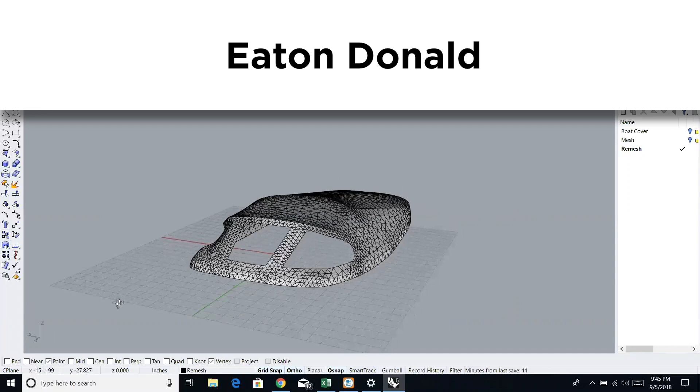I am joined today by Mark Jewell, company founder, and today we're going to be showing an example of custom canvas for marine custom canvas fabricators. Here we are showing a cockpit cover, or an example of a cockpit cover. This may be different depending on the type of boat that you're working on.

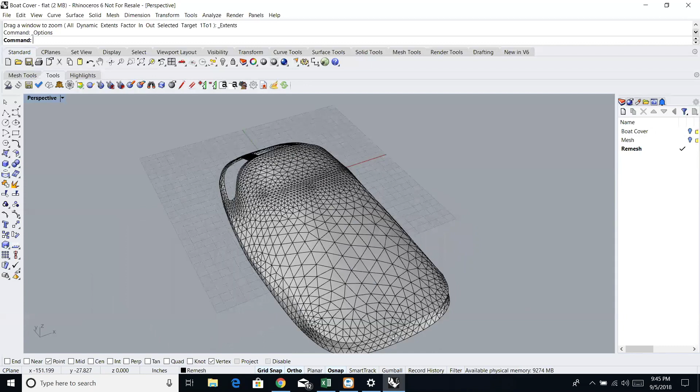And what we're going to be doing today is processing the patterns associated with this cockpit cover and showing you the workflow in ExactFlat using what we call 3D to 2D digital patterning. We're trying to create these patterns in an efficient manner that's going to be much more efficient than doing this manually.

Mark, hello. Hey, Eaton, how are you doing?

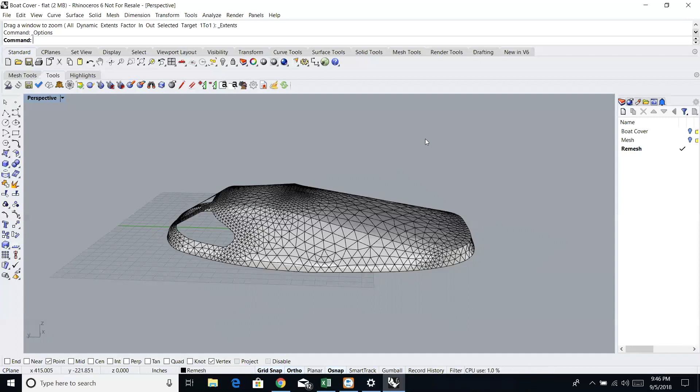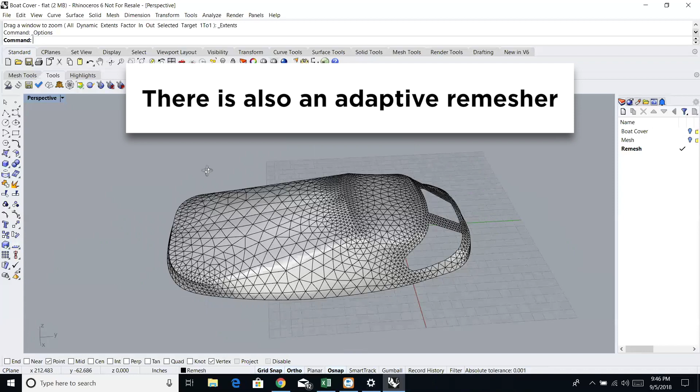I'm well, thank you. So Mark, what I'd like you to do is show everybody what's involved in creating the patterns for this boat cover here, please. Sure. So, Eaton, we have a good mesh, but one of the tools I'd like to show everyone is our uniform remesher. We have a couple of different meshing techniques. One of them is called a uniform remesher, and I'll remesh this cover or top so we can take a look at what a remeshed surface would look like.

And so the mesh is important because it represents the fabric pieces itself. Is that correct? Exactly. So basically, the better mesh, you have a good representation of the parts that you're going to manufacture. Exactly. You want to start off with a good mesh because, as they say, garbage in, garbage out. So a good mesh is going to give us a really good pattern.

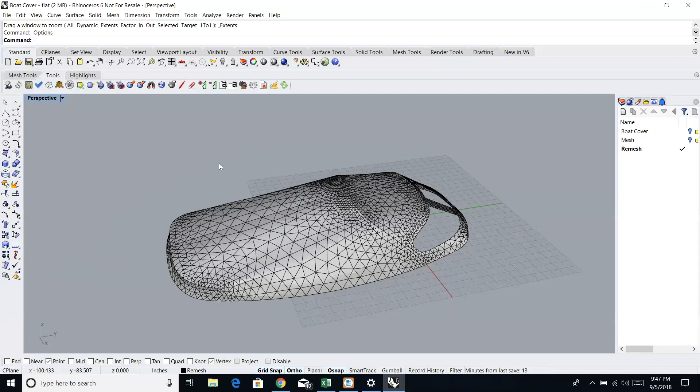And so I'll just point out that we are showing ExactFlat for Rhinoceros 3D. This is a model that was captured through a digitizer and then brought into Rhinoceros 3D. Mark, why don't you show the remeshing process and then talk a little bit about what we do to get to flat patterns?

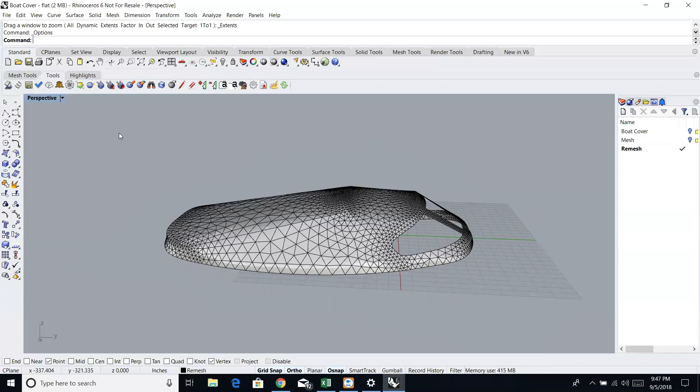Sure. So the first thing I'm going to do, Eaton, is use a command in Rhino called weld vertices. This is going to take out any of the wrinkles or bad triangles in the surface. So I'll just highlight the part. As you can see, all these points light up, and I'm just going to hit enter on the keyboard, and then I'm going to go into our first set of tools, our first tab. These are the ExactFlat tools, the mesh tools.

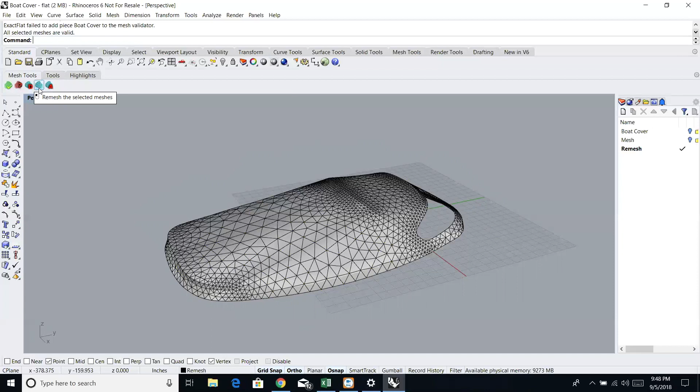I'll click this, and I have a mesh validation tool, so I can select the surface again and hit enter, and up here it says all the meshes are valid, so we have a good valid surface to work with. Then I'm going to go to our next tool over here, which is our uniform remesher. Again, I'll highlight the piece and hit enter on the keyboard. This is going to bring up our remeshing dialog box.

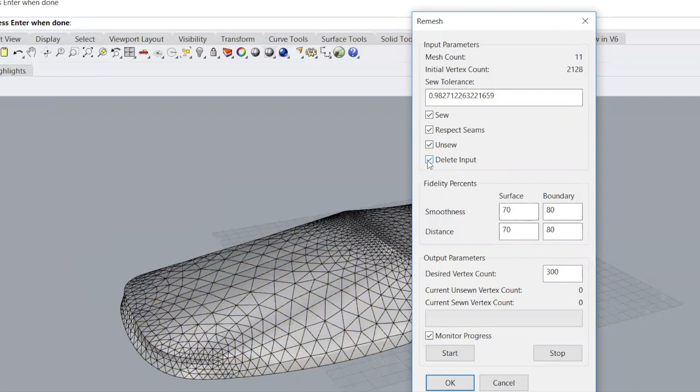So I'm going to hit sew and respect our seams. Then I'm going to have it unsew and delete the input. Deleting input means that once it's created our new mesh, it's going to get rid of this old mesh. If I don't click that on, I'm going to end up with two meshes, a good one and a bad one. The next thing I want to do is go into our smoothness.

So the boundary, which is the boundary perimeter out here and around here, I'm going to set at 90. And I'm also going to set this one here at 90 for smoothness. The vertex count is set at 300, so that would mean 300 faces or triangles. I'm going to bump this up to about 1800. So that increased vertex density should lead to a higher accuracy mesh around curves.

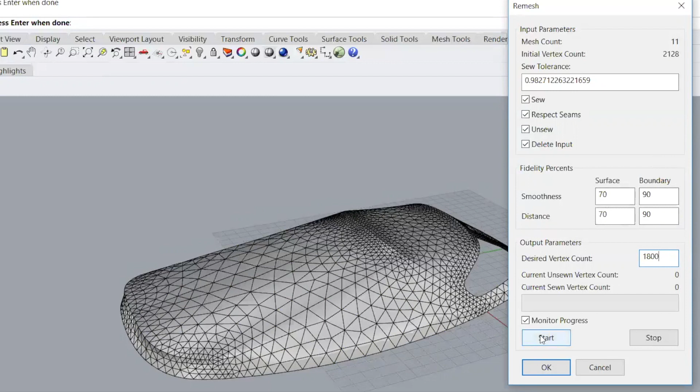Is that correct? Exactly. All right. And the smoothness actually adds a little bit of smoothness around these curves. So I'll just start this off, and we'll see how the mesh is changing.

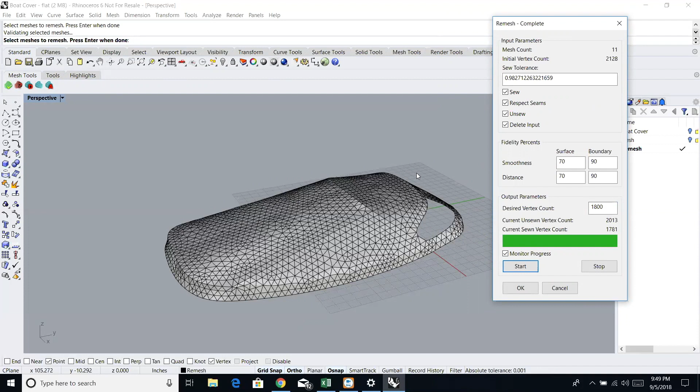So right now we're adding more vertices, and you can see visually how it's changing the mesh. So it's reorienting the vertices, and it's adding more triangles to create a denser mesh. Let's talk a little bit, before we go on, about the reorienting of the vertices, because that's essentially one of the techniques that we use for flattening to get rid of strain and sag. Is that correct? That's exactly it, yes.

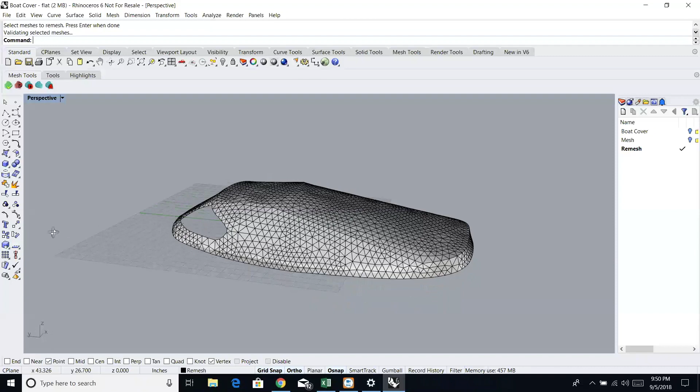Okay, so by changing the vertices, we are smoothing the material or relaxing the material, and we're also finding areas of sag where we want to put more tension in the material. Is that... That's exactly correct. Okay. So it's like fabric simulation. Okay. So now that we've created a good mesh, which is the start of our process of creating digital fabric, where do we go from here?

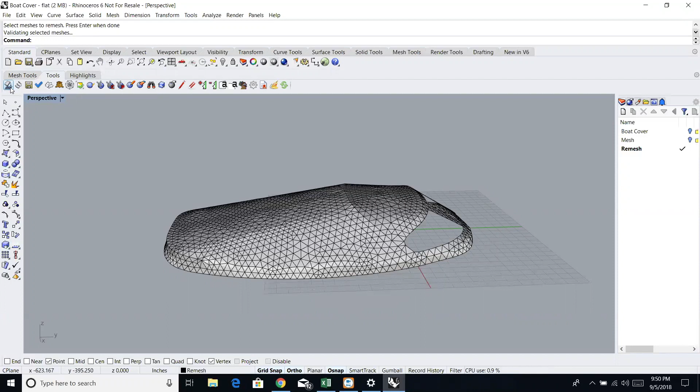So once we've created this nice mesh, the next thing we'll do is go into our tool set. And our first icon here is basically the select pieces for flattening. So as you can see here, these pieces have already been assigned by the designer. So these are basically how the pieces are going to flatten. So this is a 3D model with the split lines already in place. The split lines represent pattern edge boundaries.

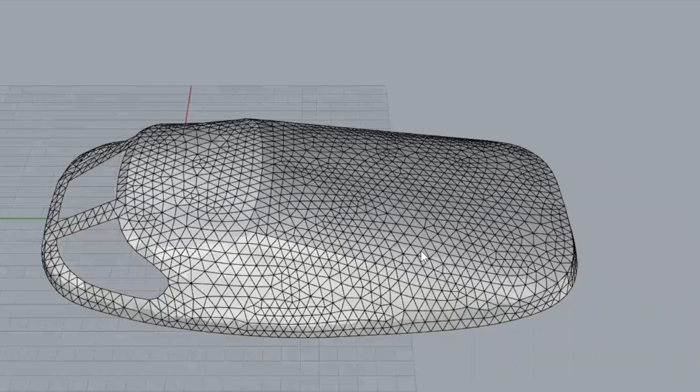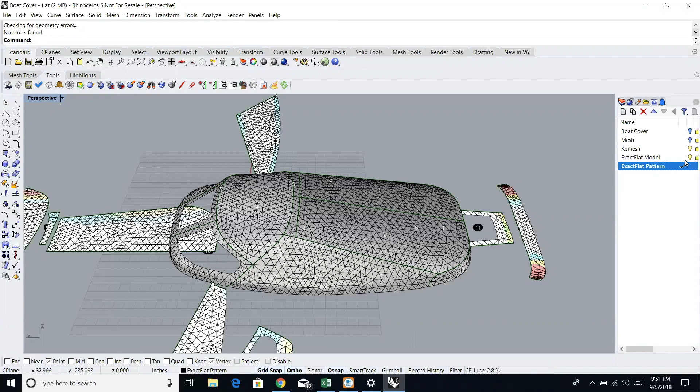Correct. So what we'll do here is we'll go in, we'll select our flattening tool, and again, rectangle, select the part, hit enter on our keyboard. And now you can see we have our 3D model here, and we also have our 2D pieces laying in the background. So what I'm going to do is just highlight or make this ExactFlat pattern active, and I'll turn off these other layers, and we'll go into our top view, and I'm going to zoom to extents.

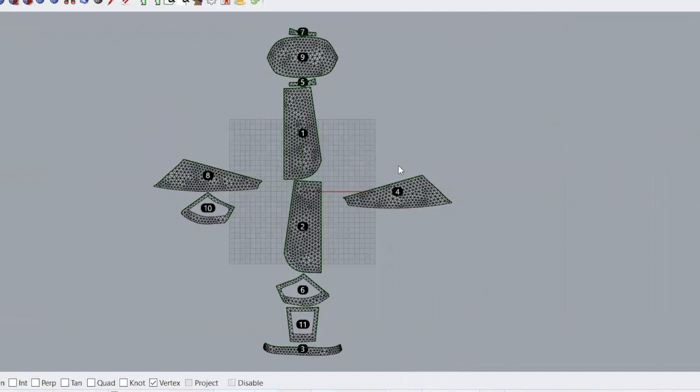So we have all these pieces in, and I'll just turn this into wireframe so you can see when the flattener flattens the pieces, it actually assigns numbers. So it's like a paint by number, or you can line up the pieces. Now you actually have identification on each one of these pieces. So this is just useful for keeping track of which piece is assigned to which piece, neighboring pieces, and if you have larger, more complex projects, then the numbering of the pattern pieces is helpful for downstream processes.

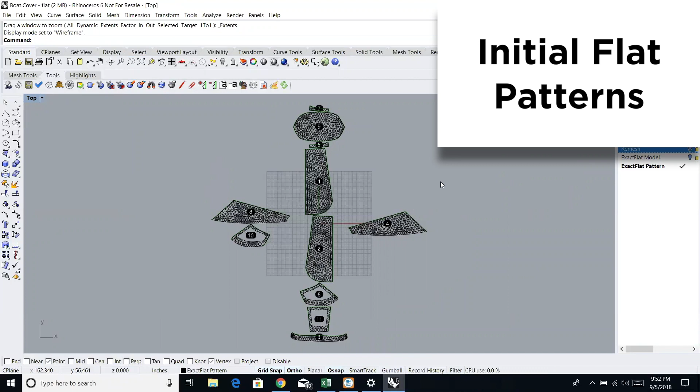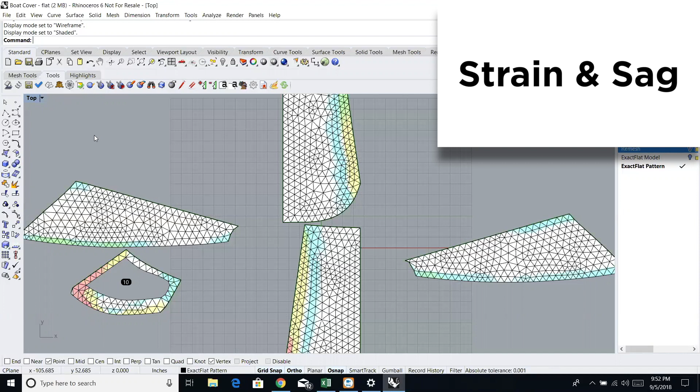Exactly. So I'm just going to go back into here, and we're going to turn on our finite element analysis, which actually shows the strain on the part. So I'll go into the shaded view here, and there isn't a lot of strain, but you can see here there's a crimson color. This would be maybe 11% strain on the part, but we haven't optimized it yet. So this just gives us a visual cue of where the stress and strain would be.

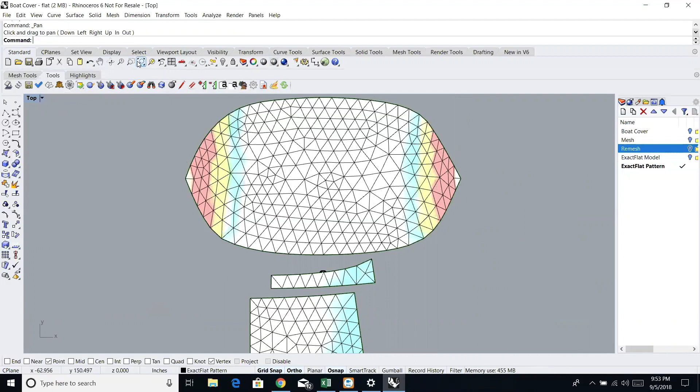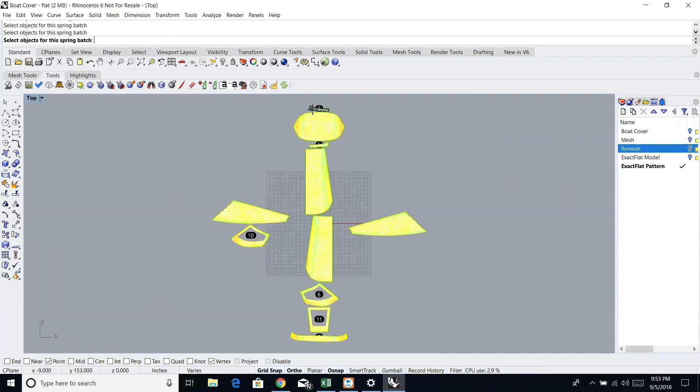Here's another good example of a part that has a little bit of strain in it, but as I said, we haven't gone in to flatten it or optimize it yet. I'll just go back out here, and now what we're going to do is go to our next tool, which is our optimize tool, or some people call it the spring tool, and we'll go in and we'll select the pieces that we want flattened. And I'll just hit enter again on the keyboard, and we'll watch what happens.

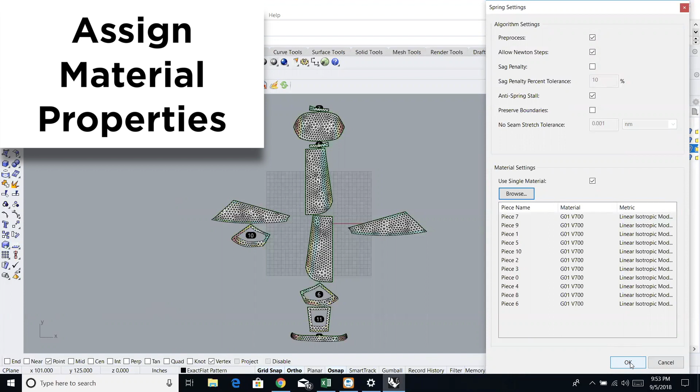So right here, we have our material settings. We can browse different materials that we may have. So I'm going to use a Sunbrella type material, and I'll just hit OK here. And I'll hit OK on our material settings, and we'll see how this tool works. So it's going to go through each piece, and it's going to try to obtain zero strain on each piece, or zero energy on each piece.

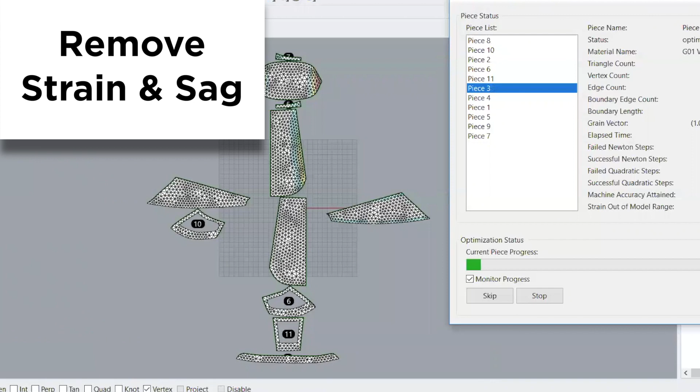So if it's zero energy on each piece, that means it's eliminating both the strain and the sag. Is that correct? Exactly. And that's how we get a very accurate pattern. So from a geometric perspective, you are trying to maintain the seam edges adjacent to pattern pieces, while at the same time reorienting the surface area. And I can see the surface area is changing on some of these pieces in such a way that the strain and sag is eliminated. Correct. Okay. So if I go over here, it's finished. So that took about 56 seconds.

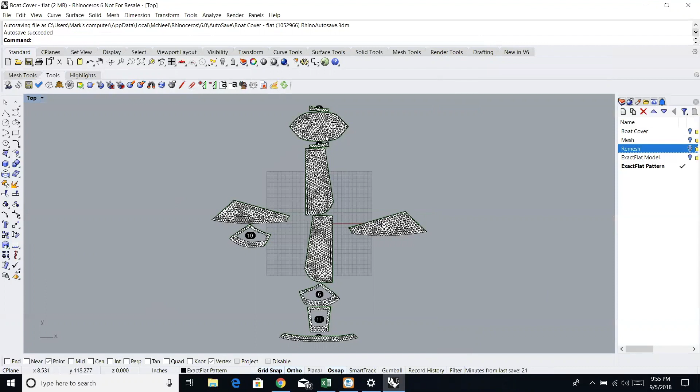Again, that has a lot to do with how we redid the mesh. We made a really nice mesh, and next thing we... Okay, so could you just arrange these pieces in a way which is visually similar to the way they're going to be sewn together? Sure.

Sure. So one of the unique features that we have in this tool is what we call our find feature, which is in our tools. And if you look here, the binoculars represent our find tool. And I'm going to set our offset at about 10 inches. So we're working in imperial units. So I'm going to set this at 10 inches. And I'll just go around.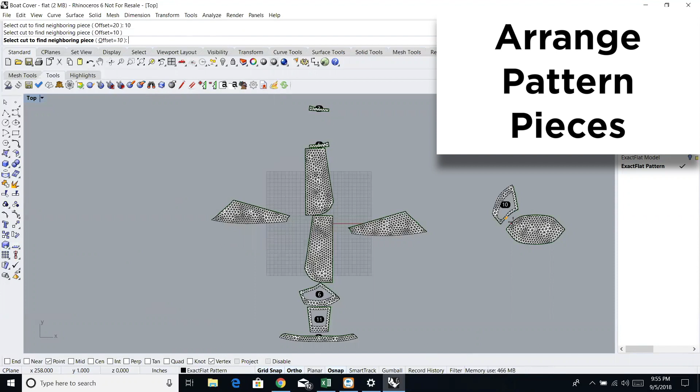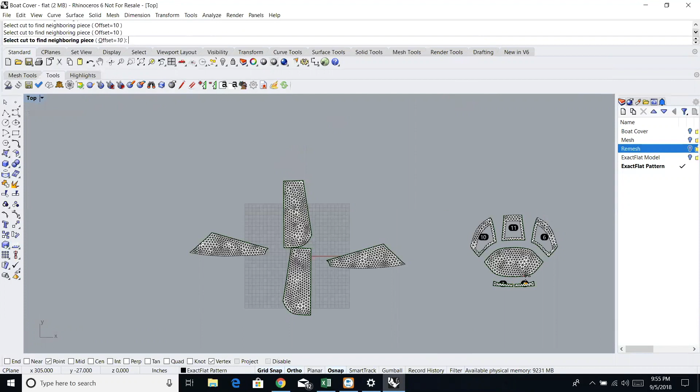And as I select an edge here, you can see it'll actually pick the piece and highlight the piece that it gets matched to or mated to. And so is this because the individual vertices in 3D are associated, and then you maintain those associations in 2D? Correct. So that's a very valuable feature.

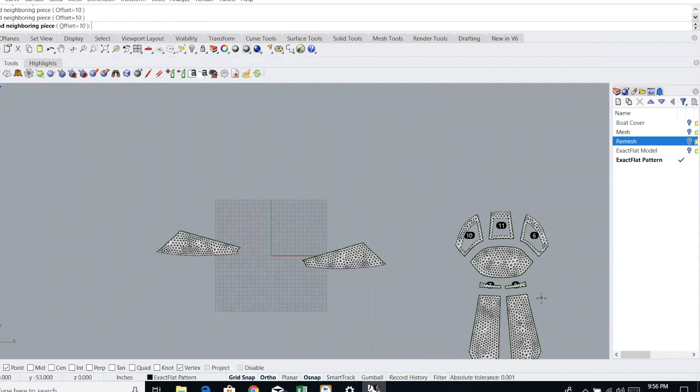You know, in other 2D tools that are used for patterning, you would have to eyeball all these pieces because it's coming as a 2D piece. In our software, we start off in 3D, as you said, and we transfer the vertex information from the 3D model to the 2D piece. So we know exactly where everything fits.

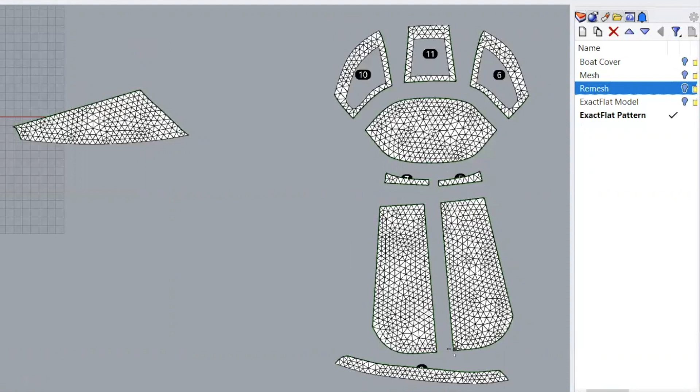So eventually these pieces are going to be sewn together. So this is not just a time saver in laying this pattern piece out visually. It's also a way to ensure that your pieces will fit together perfectly. Correct. Okay. People want to know about the accuracy because so many different programs out there are claiming to flatten from 3D to 2D, but they have problems with production level accuracy.

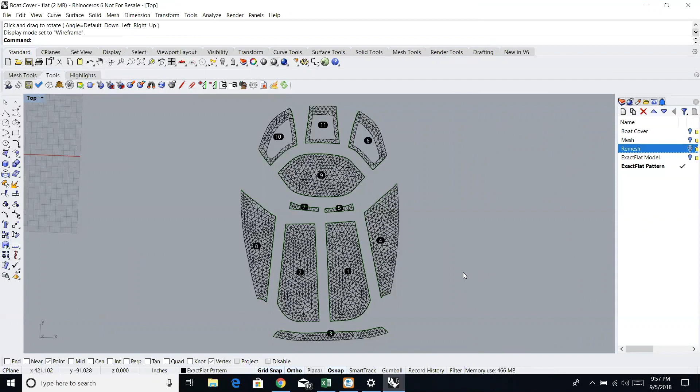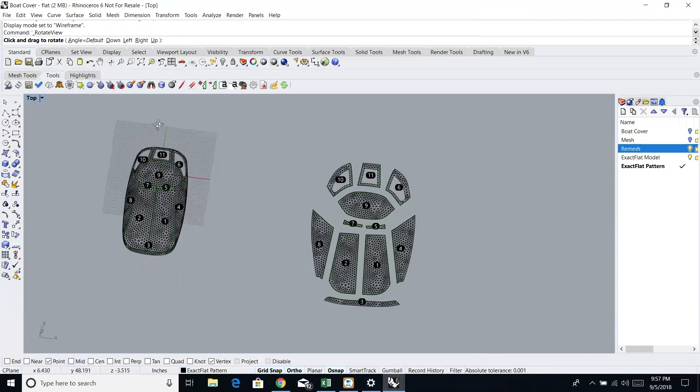So what I'd like you to do is go through a process of measuring pattern pieces in 3D, and we're going to compare them to the measurements in 2D. Okay, so what I'll do here is I'll just go back into our layer and I'll turn on our mesh. So we have over here our 3D piece, and over here we have our 2D piece. You can see that this is in 3D. And I guess we'll just start measuring.

We'll start from the bottom, Eaton. Okay, sure. Why don't we start from the bottom? So piece number 3, what is the 2D measurement and what is the 3D, or whichever you want to do first? Okay, I'll start over here with the 2D. So I'll go to piece 3. I'll highlight that, and we have an area of 704.866. And if I go to my 3D piece here and hit enter, we have an area of 704.065.

Okay. So we are off by about 3/4 of a square inch. Right. On 700. So that is, for production purposes, perfect. Exactly. Okay, let's go measure some of the other pieces, please. Okay, so we'll do number 2 here. 2D, so we have 2,821.97.

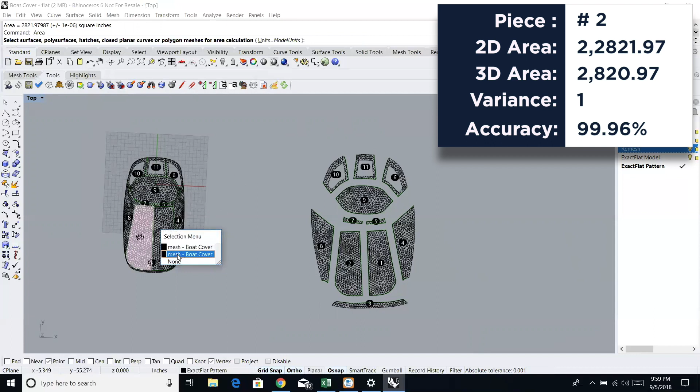And if I select piece number 2 in the 3D, we have 2,820.97. Okay, so we're off by about 1 square inch on 2,800 square inches. Again, from a production standpoint, that's essentially perfect. Right. So number 8 is 1918.39.

And if we go into number 8 here, we're at 1917.51. Okay, more or less 1 square inch on almost 2,000 square inches. Number 7, the small piece here, is 100.86. And if I go to number 7 here, whoops. And we're at 100.80.

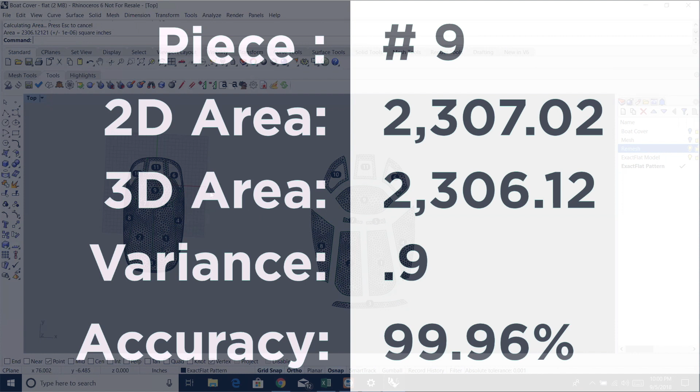Okay, and then let's get to number 9, because that was one of the pieces that had some strain in it and some sag points as well, if I remember correctly. If you can do both 2D and 3D, please. Okay, we're at 2307.02 in the 2D. And 2306.12. Okay, that's off by about 1 square inch on 2,307 square inches. So from a production standpoint, that too would be perfect.

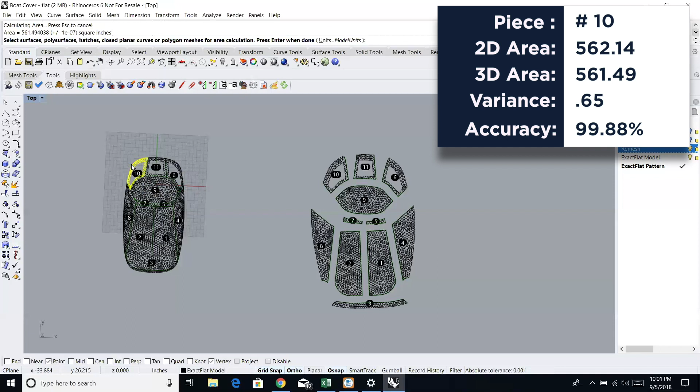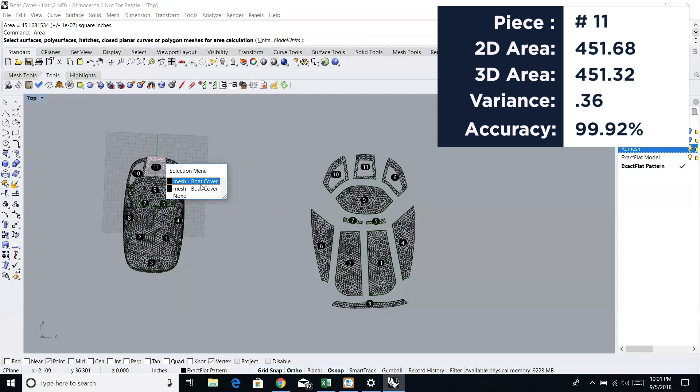Right. And if we look at number 10, 562.14. And number 10 here in the 3D, we're at 561.49. Okay, a little bit more than half a square inch there. Again, perfect. Okay, and this selection here, number 11, 451.68. And in the 3D, we have 451.32.

So if we look at all of the 7 pieces that we've measured combined, the area of the 2D parts are 8,866.92, the 3D 8,862.27, for a variance of 4.65 and a total accuracy of 99.94%. I think everybody would agree that this is well within the tolerances that would be considered acceptable for manufacturing. And the key point we're trying to make here is, in about 5 minutes, you get what are essentially perfect patterns.

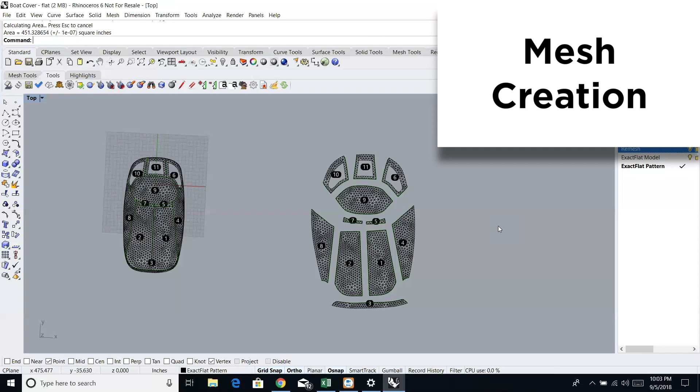Okay, so it's in part because of the way that we construct the mesh pieces in the beginning. It's in part because of the way that we assign the engineering characteristics of the material. Yes. And then it's in part in the way that we have the mathematical algorithms simulate the strain and the sag. Correct. Okay, let's talk about the things that you need to manufacture these things and put these pieces together so that they do fit.

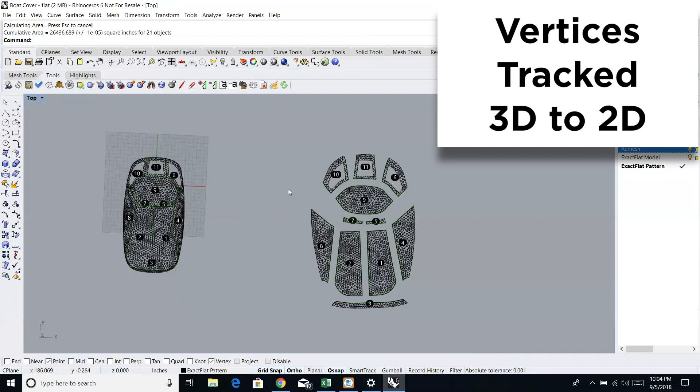Show me how you put alignment notches in here, and let's have a discussion about why those are so accurate. Since, as we mentioned, we're going from a 3D to 2D, then we track the vertices from the 3D and onto the 2D. When we add our notches, and I'll just add an eye notch, or some people call it a slit notch here. I'll hit my add button, and as I go around, you can see when I select one edge here, it knows exactly where this goes into all 3 pieces. So this notch gets sewn to this piece, and it also gets sewn to this piece.

So this gives you a very accurate way of, as I said, we used to call it walking the pattern, where you have to eyeball. In this case, the software knows exactly where the notches go. So how does it know that? Let's just talk a little bit about that. Help people understand how it knows precisely where to put. If you select a location you'd like to have a notch, it finds the location on every adjacent or related pattern edge. How does it know that?

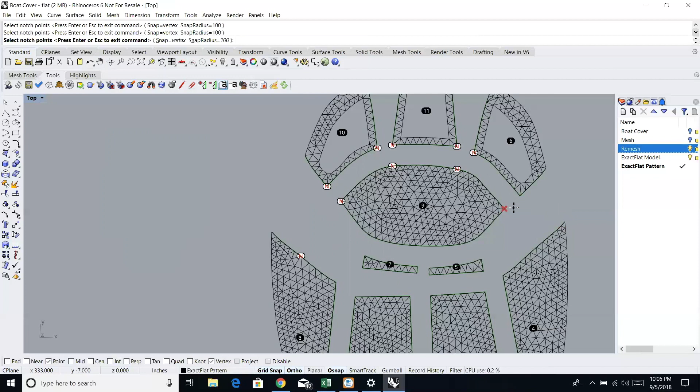Well, here, I'll just throw this one more piece. Actually, maybe what I'll do is I'll zoom to extents so we can see the model. And as you can see, the notches on the model are on the 3D model. So because we know where the vertices are on the 3D model, when we go to the 2D model, it basically knows exactly where to place these notches.

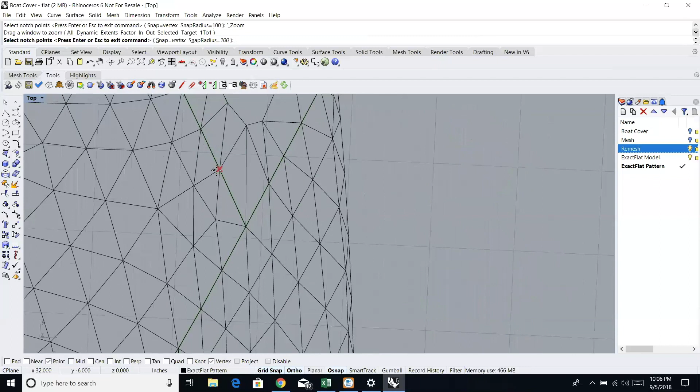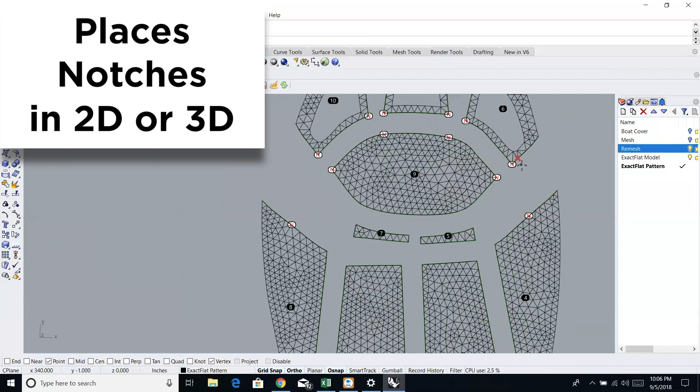So for instance, if I go into this area here, there's a notch that would go right here. I'll place it right here. Now if we go on to our 2D pattern piece, you can see it's exactly notched where it had to be. So we can notch the 3D shape or the 2D shape. Whatever we do to the 3D happens to the 2D and vice versa. Okay, so the accuracy is based on the vertex locations.

Mm-hmm. Yes. And because the pattern pieces are associated to one another in 3D, and the pattern edges or the seams are associated to one another in 3D, during the flattening process, those precise locations are maintained. And therefore, when you place a notch on one edge, you do not have to guess where it goes on the other edge. Correct. Exactly. So it knows exactly where the notches have to go.

Okay, so we were talking about accuracy before. So accuracy really means, can I put together a sewn, fabricated piece of custom canvas for an individual boat and have it fit perfectly? Because that's what people care about. They just care that it fits perfectly and it's correct. Right. So there is the meshing process at the beginning, which is the start of the creation of what we call digital fabric. Then there is the highly advanced mathematical algorithms, material assignments, and so on.

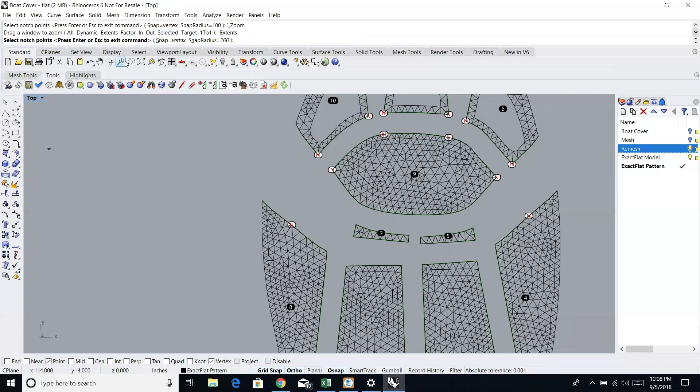That is part of the flattening process. Right. And then we have here the notch locations for the sewers so that this can be put together in an accurate way that leads to great fit. Correct. Okay. Why don't we put a few more notches on? Just zoom out if you wouldn't mind. Just show people how quick and easy it is to do this.

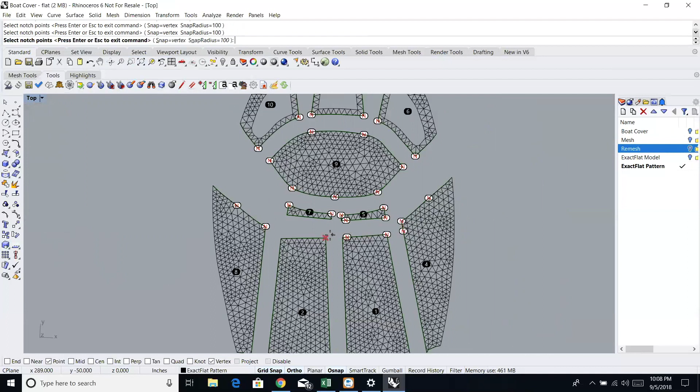And then what's the next step after that? So just go ahead and put some notches on if you can walk us through the final steps of the process. Yeah, so basically I'll just add some notches here and here. I'll put a notch here and we'll just quickly go through and you can see how quick this works. You can imagine what it would be like if you had to use your eyeballs to eyeball exactly where all these notches went. It would drive you crazy.

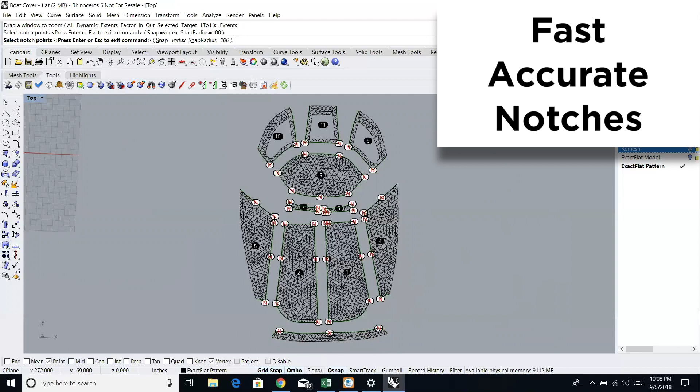So I'll just go through here. And let me just zoom out here a bit and I'll put one here. So you can see we've got basically all the notches added onto the piece or ready to go. I'll just get out of my notching tool, close that. Next thing we'd want to do is export the DXF.

So we don't use the Rhino export DXF, we use our own export DXF, and the reason being is all these notches and all that information, if I just saved it out as a Rhino DXF, all that information would be lost. When I save it out as an ExactFlat DXF, notches, seams, all that information is going to go out to the DXF for our cutter or our plotter.

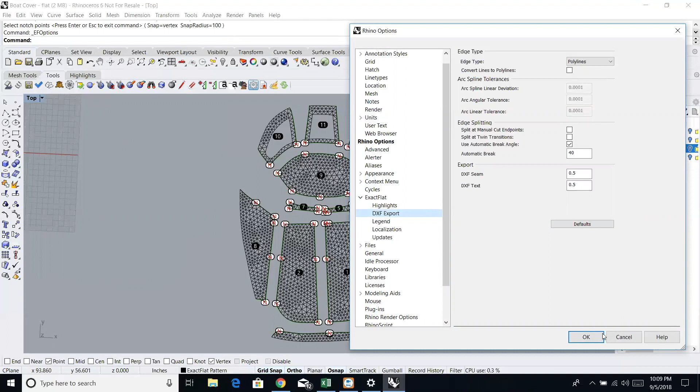Another thing I'll just show real quick, Eden, is if I go into our tools, and we're in our ExactFlat tools, and I go to my DXF export, you can see that the seam line is set at 1/2 inch, and my notches were 1/2 inch as well. So this is a very large canopy or cockpit cover. So when we go in, we can take a look at how that's going to look in our DXF. I'll just export out the DXF now, and we'll just call this cover.

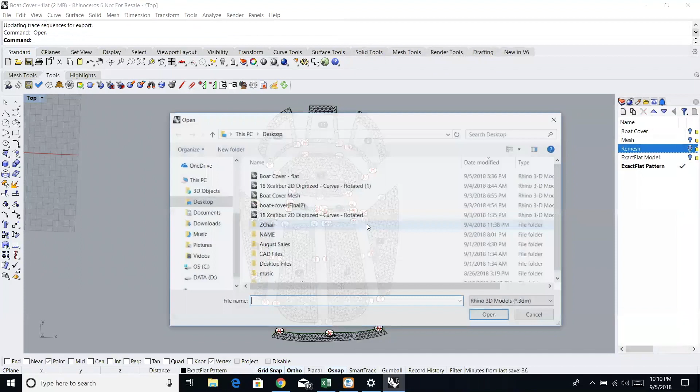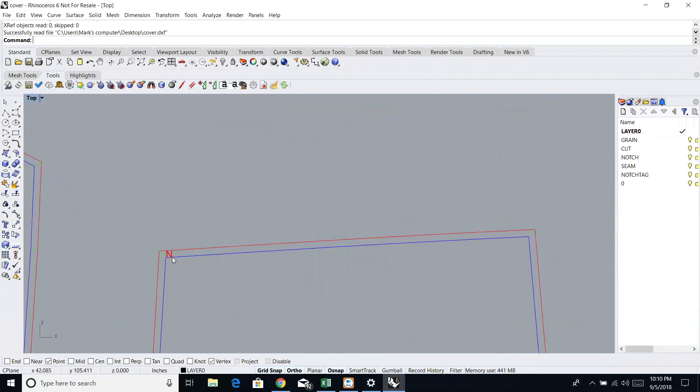And I'm putting it on my desktop. So we'll go here. We'll open up that file. Go into DXF. And we'll select cover. And we're in inches. I'll just hit OK here. And there you can see our cockpit cover. And if I zoom in, you can see all the notch locations that I put. Notches here. And the notches up on the top here.

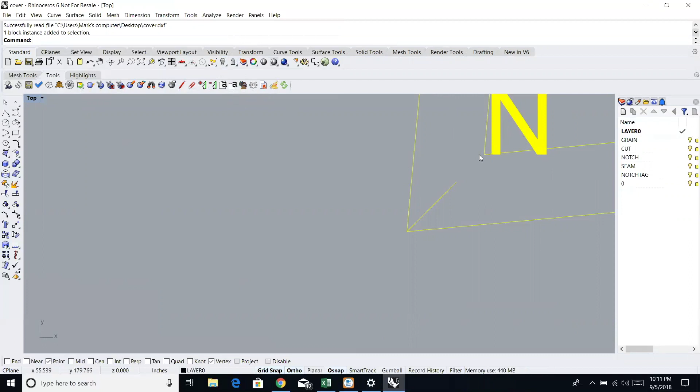If I zoom right in, you can see this green, it's a green notch. These all show up in our layers. The N just represents N for notch. You can have any number or letter. So basically notches would go A, B, C, D, E, F, G, or 1, 2, 3, 4, 5, 6, 7. That can all be assigned in the ExactFlat tools.

So if I just zoom out here, as I said, we can turn on or off our grain line. The grain line is just giving the grain direction. That's this white line in here. Just shows the direction of the material. Our cut line here can be turned on or off. Our notches, which are green, you can't really see them, but they can be turned off and on. Our seam lines can be turned off and on. And our notch tags, which would be the N, can be turned off and on.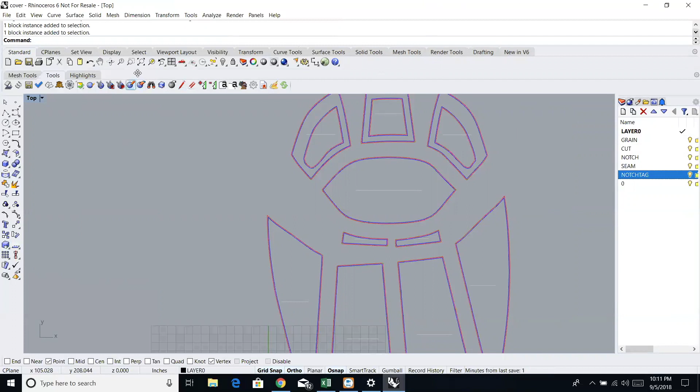So there's quite a bit of capability for the software. As I said, these layers would be exported out to a plotter and a cutter. The DXF files can be easily read by any of these systems, any of this hardware. And if you wanted to do further finishing of the 2D patterns, you could import this into your preferred 2D patterning tool of choice.

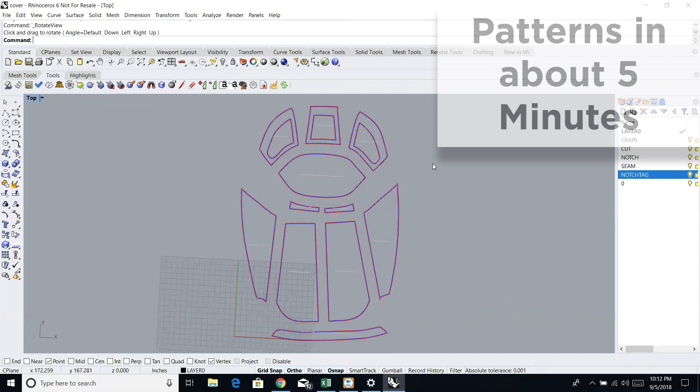Okay. All right. I think we'll wrap it up there. The process, were you to run it without my interruptions, appears to take about, in this particular case, maybe 5 minutes. Yes. Okay. Well, Mark, this has been very helpful.